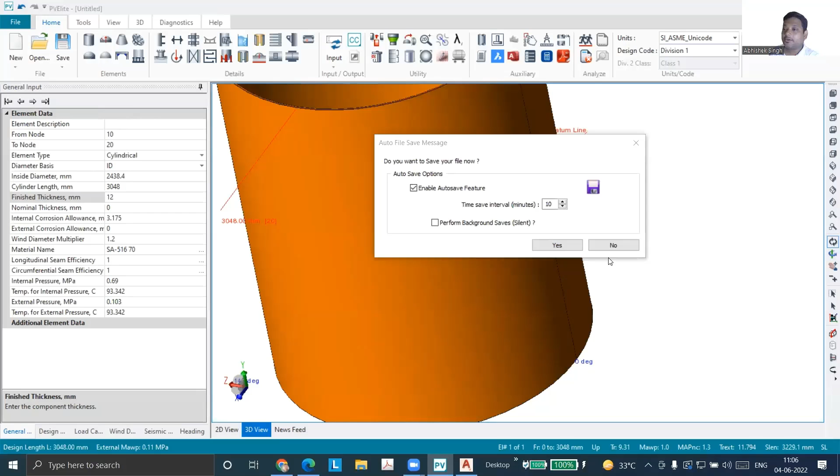So there was one question in the group: how to model this SRN nozzle in PVElite? I think I have also something related. Yeah, so we can just see that right now because we are already talking about that. So let us model. We have already made a... I hope you guys can see my screen. Guys, screen is visible, right? Yes, sir. See now, you might have been using these 4 types normally.

These 2 types are for set-on. This is also very rare. So mainly we'll be using set-in type of nozzle, 1 or 2. Now, if you go to this 5th one, if you just keep your cursor there, you'll see the type: integrally reinforced type. And this is with lip. You can see the lip here. This is what I was trying to make. So yes, this is a nozzle from forging with lip.

The second type is integrally reinforced, but there is no lip. So finally welding will be groove weld. So you will not be able to do 100% radiography, but it is integrally reinforced. So these 2 are different. Here you get 100% radiography. Your forging diameter is quite large in this. So the integrally reinforced with lip is even more costly than your normal integral. It may be 1.5 to 2 times costlier because your whole dia becomes really large.

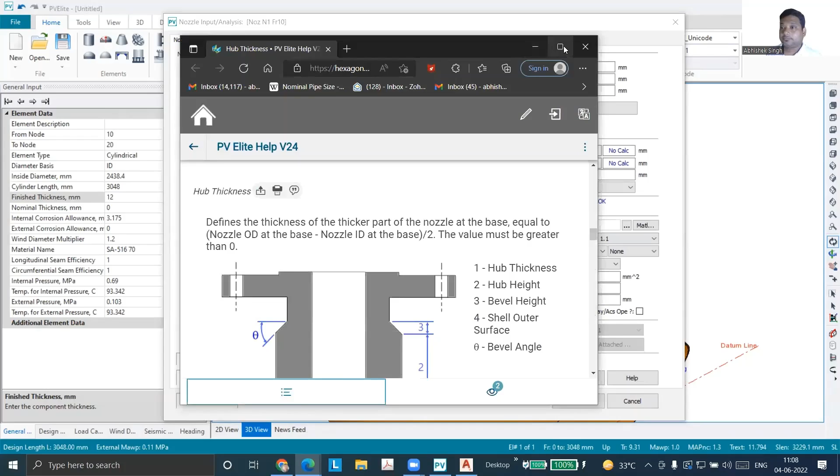So I just pressed F1 and you can see all the definitions. Sometimes you may struggle to see which thickness it's calling hub thickness. So this is your hub thickness, this is hub height, and this is the bevel height. These are the 3 additional inputs which we need to provide. What is the thickness of the neck in this case, guys? The same thickness that we have for the normal nozzles. Yeah, so I'll just tell you because that also becomes really confusing.

Then we forget this is not the nozzle neck thickness. What is your nozzle neck thickness in this case? This is your nozzle neck thickness. So whatever data you have provided in this location, that is for nozzle neck. Is it making sense? And here we are providing for hub. I hope I'm making it clear, guys. Yes, sir. So now if I have to qualify this, let us first give all that.

See, mostly if it is hub type, your nozzle neck will be forging type. So you have to first of all select the material which is for forging. You'll have to start from there. I'll just delete that sketch part. So now, what will be my forging material, guys, if I have to make a nozzle from forging? SA 105. 105? Yes, sir. For pipe also? Yes, sir, pipe also.

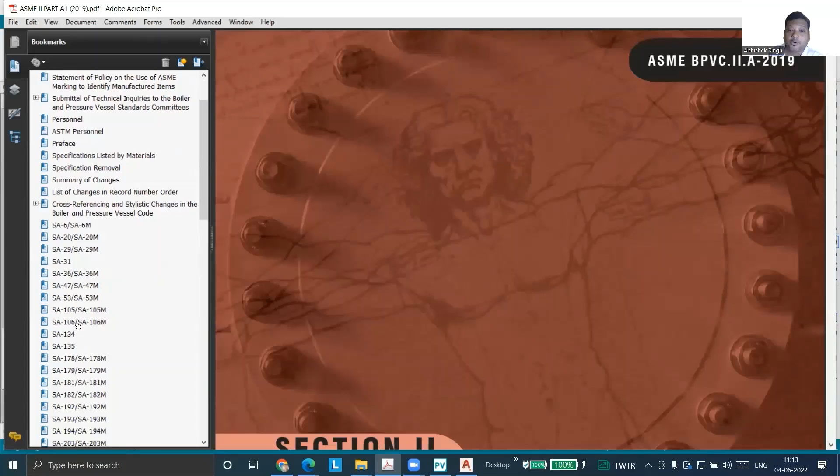So if I go to SA 105, where do I find SA 105? Carbon steel. Section 2A, part 1. ASME Section 2, Part A, and because there are too many specifications, that is divided into 2 parts. We are in part 1 because 105 comes from the start to 450, and after that is part 2. So when I go to the specification, it reads specification for carbon steel forging for piping. Is it lighting some bulb for you? This is for piping application, not for pressure vessel parts.

That means a standard flange you can consider as piping, but your nozzle or a girth flange which is coming in your vessel is not piping, it is a pressure vessel. So 105 is always made for piping application, not for pressure vessel. If I have to select a forging for pressure vessel, then which standard will it be? 266. Correct, 266. Very rightly said. So it is 266.

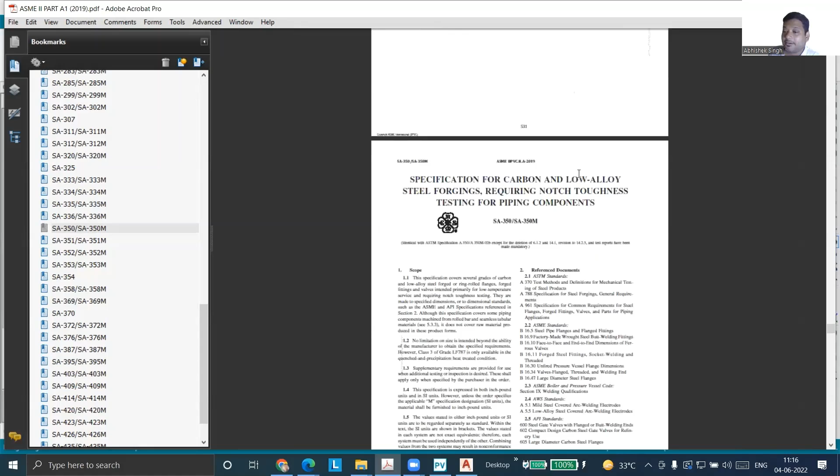For low temperature pressure vessel component forgings, we use SA 350. If you go to 350, we can see it is for carbon as well as low alloy, requiring notch toughness testing. Again, you can see here it is for piping components, but still for pressure vessels we also use the same material. So what about SA 765? 765 I've rarely used, but we can see what is written.

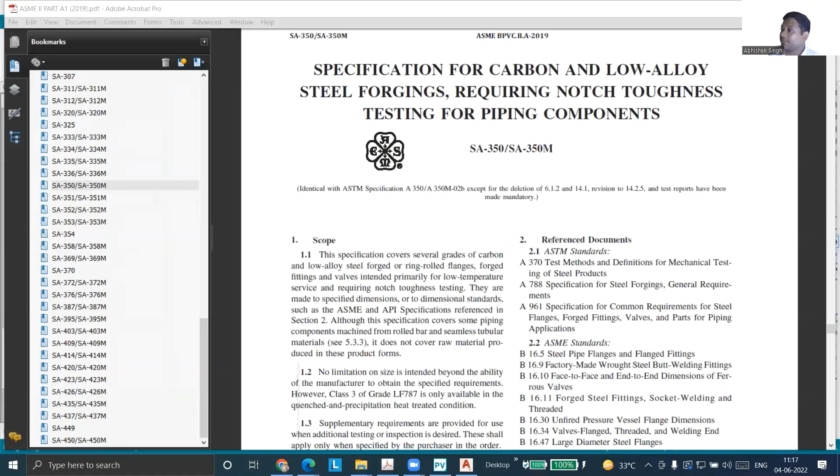I have not used 765, but see, there can be lots of different materials used in different industries. The material itself is a science; you can go deeper and deeper, and there are still lots of things to learn. So if you see 765 here: specification for carbon steel and low alloy steel pressure vessel component forgings with mandatory toughness requirements. So if the toughness requirement is mandatory for a pressure vessel component forging, we should go for 765.

Okay, who told about 765? No, sir. I have seen that 765 is being used with low temperature vessels. Correct. It is true. That is made for low temperature pressure vessels and pressure vessel component forgings. So if you have any doubt, just go to that specification, and if you read it, it will give you lots of information. We have not seen it in detail, but if you just go to the description itself, it makes many points clear.

Okay, guys. So now in our case, we just started with the first point. You see here, every point looks like a simple question. Sometimes when you ask a question in WhatsApp, it really makes it a little difficult for me to answer, from where I start, because I always have a habit of explaining things from the basics. So anytime you feel your question is not answered to your satisfaction in the WhatsApp group, keep that question for later, where we can discuss it in the live class. The query you have, others may also have the same query.

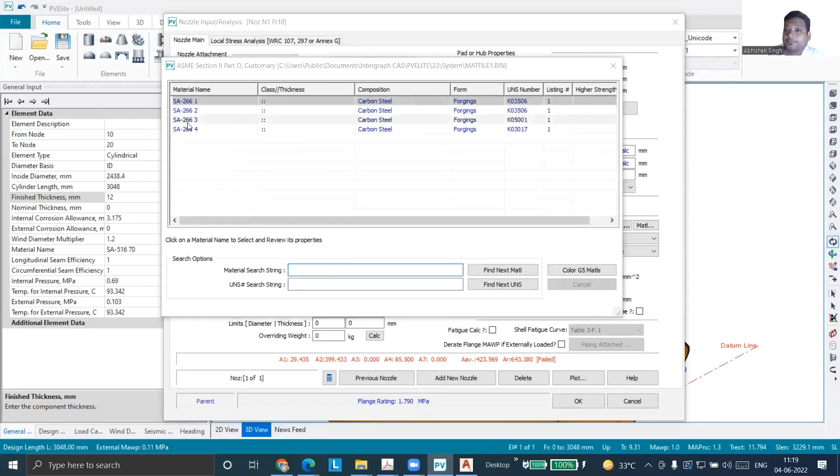So we have selected that forging material. Now if it is a forging, you don't have to go with schedule. We can just go with the actual dimensions; like if it is 6 inch, let's go with 6 inch based on ID or OD, and whatever actual thickness you are selecting, you can give. Okay, so 20 is failing, 25. We'll have to give the others also, then only we can see whether it is failing or not. Let us provide all the inputs and then see. Radial nozzle projections, everything is okay.

Now hub thickness, what should be my hub thickness? I hope you know what hub thickness is. You're talking about this thickness. So what value should I take, guys? Any random value more than our nozzle thickness. Yeah. So let us take 40. Now see, before providing that hub thickness, if I'm increasing this, there is no point, because finally the hub thickness was smaller, right? So it was failing here. You could see that failure, but it is not that this is the thickness which is required.

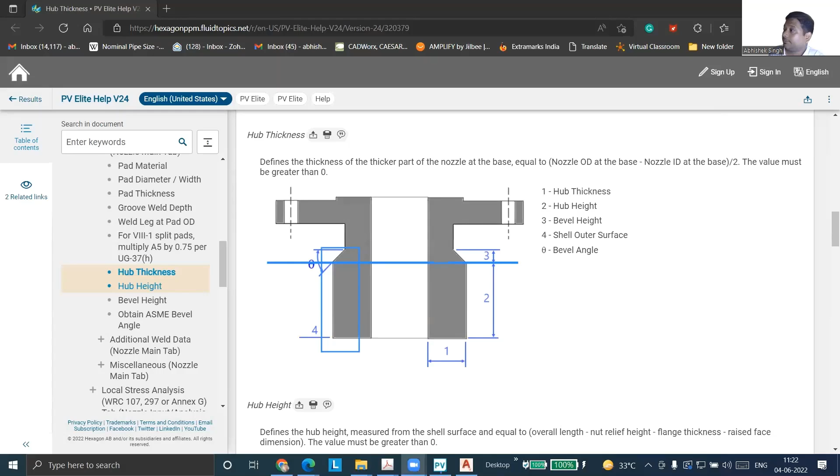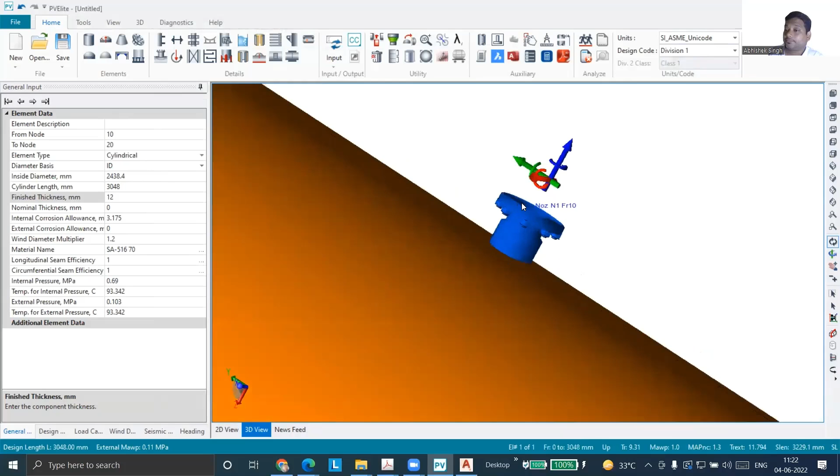So I'll come back. Then let us clear this. So 100 mm bevel height: in ASME there is a particular angle mentioned for this bevel height. If you see UW, you will get that value. Even if you use this obtain ASME bevel angle, you can just click on this and it will automatically change this dimension. If you want to round it off, you can do 90 and 10, so it will be very close to the angle which is given. Then the rest of things are okay. You can just put okay. Now this is your nozzle with self-reinforcement.

Okay, guys. Is it clear? Now, if I just change it to... So how do I give the 90 mm height, on what basis? There's no basis. See, if you just see what is the upper limit, based on that, you can reduce.

Now, let us come back to that 20 mm I had given and that 90 mm. And this was 10, right? So 20 or 30 it was. Last time we had given 20, 90, and it's passing now. So now you can just keep on. You can see here what is the area you're getting and what is the area required. So 851 is required and your area is 1199.

So if you keep on decreasing, let's say 50. Still we are beyond, I think, because normally the thickness is very small, right? 12 mm. So what is the limit for the vertical normal direction nozzle reinforcement? 2.5 times thickness. So if we do 2.5 times thickness, 24 and 6, 30. So if I take 30, now you see still 119.

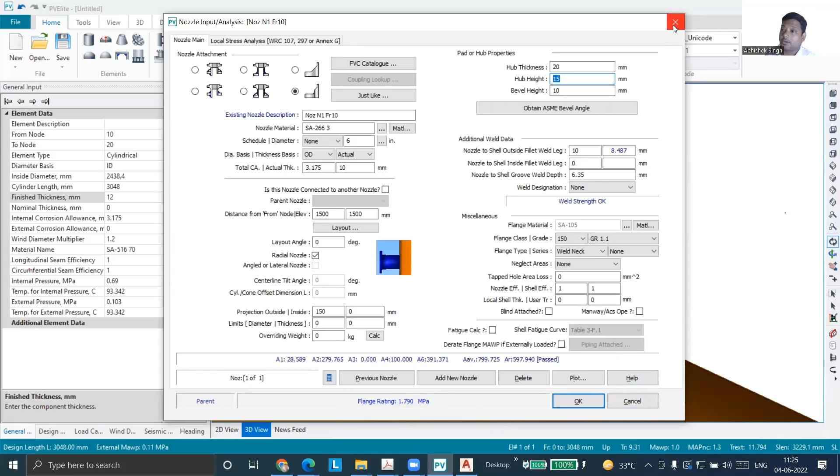Yes, more than 25. Because finally, if you're providing reinforcement, this length also becomes critical. Your neck has to have a proper projection. So you have to increase not the neck thickness, but the length of that neck, so that finally your projection is exactly where you want. And if you're providing a hub, we generally keep it almost half of that. We don't give such a small hub.

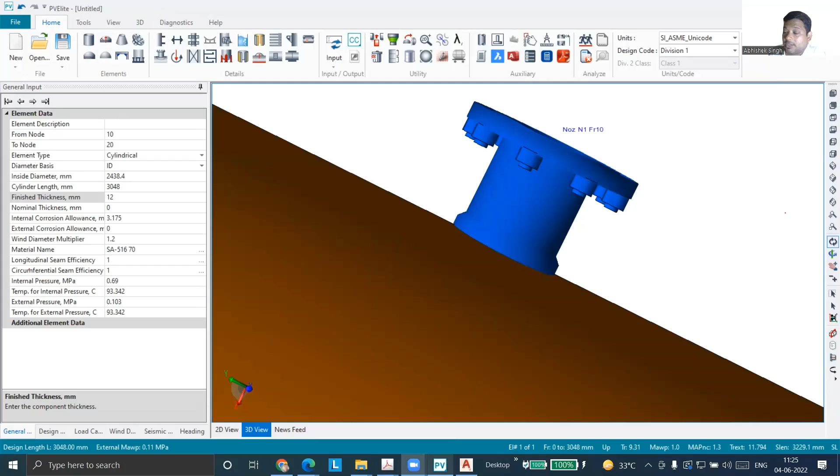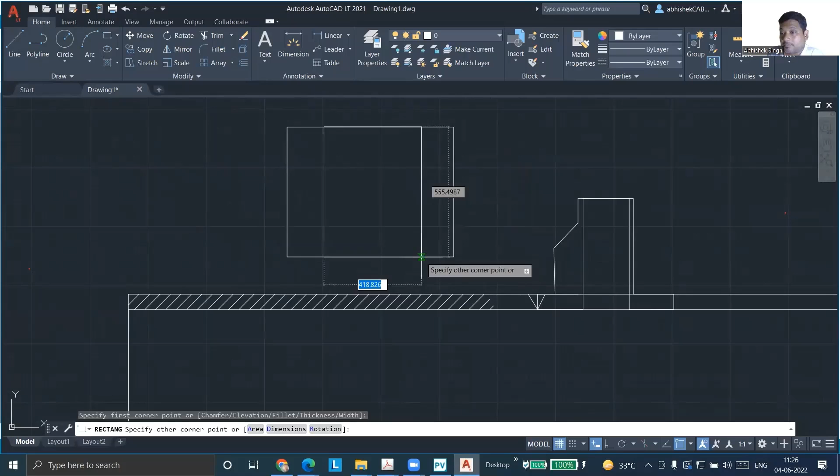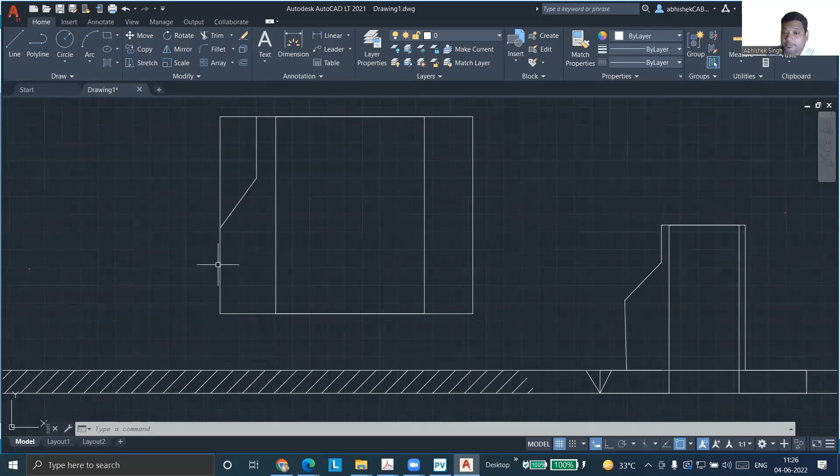Because finally what is happening, you are getting a forging. Let us discuss that also. You might be thinking why provide extra, but it is otherwise. If I have a nozzle like this, this is my nozzle. What finally we want is this forging. This is the final shape you want, and you will not get this shape directly, right? You have to order a forging of what I have made. Making sense, guys?

This is the hashed portion you want, and you have ordered a forging with this shape. So finally you have to machine it to this shape, isn't it? So if you have to machine and remove, why not utilize the maximum, right? For your machining activities also, it will benefit you to give higher thickness here. It is a little otherwise. Normally, to provide higher thickness we have to spend money, it is costly, but in this case it is costlier to remove material because that many machining hours will be added.

Making sense, guys? That is the reason with self-reinforced nozzles you will see the proportion of hub is quite large. Yes, sir. Okay, got it. So you don't have to bring it down till here, because anyway you have to meet that projection of the nozzle. If you don't meet that, your boltings and all will become really challenging. So instead of machining the whole nozzle neck to that neck thickness, we provide that hub. I hope it is making sense now.

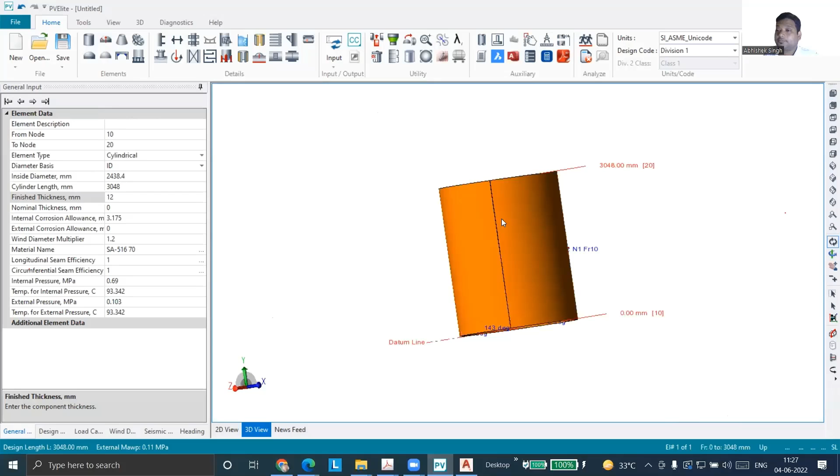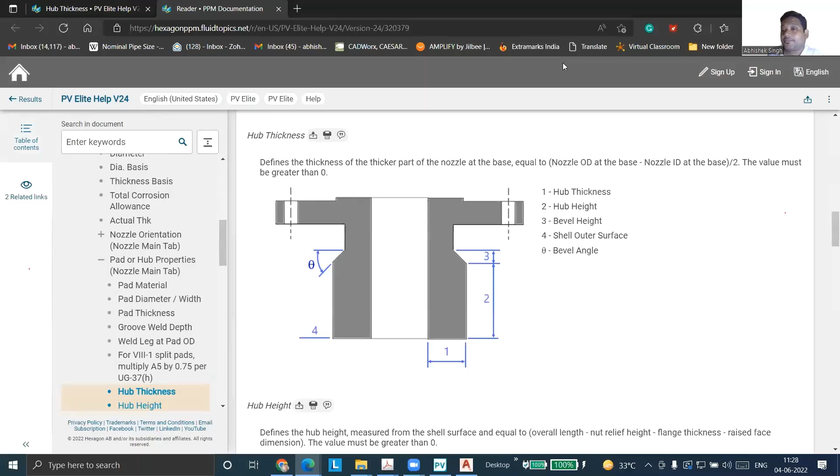Okay, so I hope this type of configuration is clear. If I just change it to the other one with the lip type, now you see here only the hub thickness and how wide it is is important. So what is my hub thickness in this case? Which is my hub thickness, first of all? You can again press F1 in PVElite, and the same diagram is opening. So now let us see some different configurations they have mentioned.

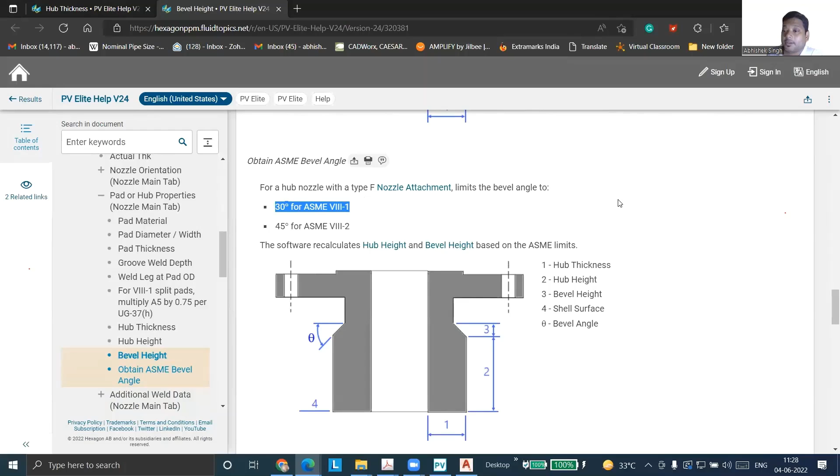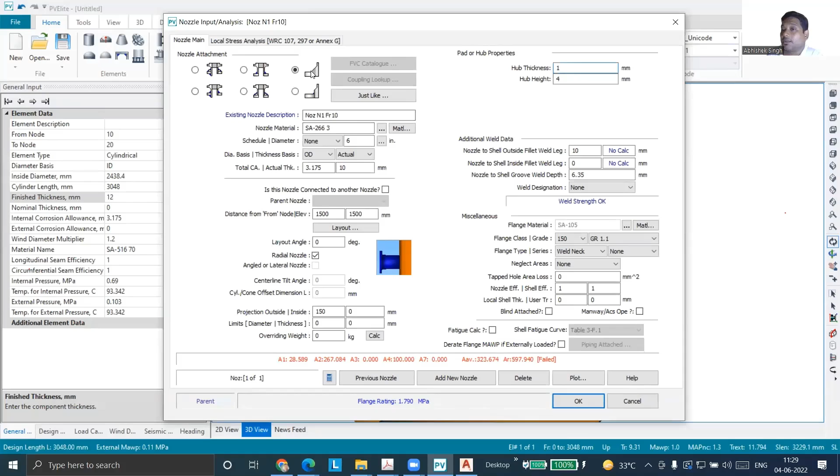Okay, so now if I have to provide a hub thickness, hub thickness is this thickness. So in this case, what will be my hub thickness? Till here, this point. Okay, if I draw it for that case, we already have this. So yeah, just draw it. So if I have provided a hub like this, my hub thickness is this point.

Okay, so if I'm taking that hub thickness like that, let us take it as 30. Hub height at least 25, 30, same philosophy. Okay. Now if it is again 30 and this is not meeting, no, it's meeting actually. See, sometimes PVElite takes some time to recalculate. So you have to just wait and press tab so that it will adopt the values which you have provided. Okay. So now you see that the area you have provided is much more than what is required. So it is okay.

Now you can just plot it also and see how it is coming; we'll have to change that. Fillet will not be applicable for this case. Okay. So you can see here that limit is also indicated. See here. And you also have to remember that it is not 12 actually over there. Required thickness is even lesser than this. Okay, so your vertical normal applicable reinforcement limit is even lesser than 25.

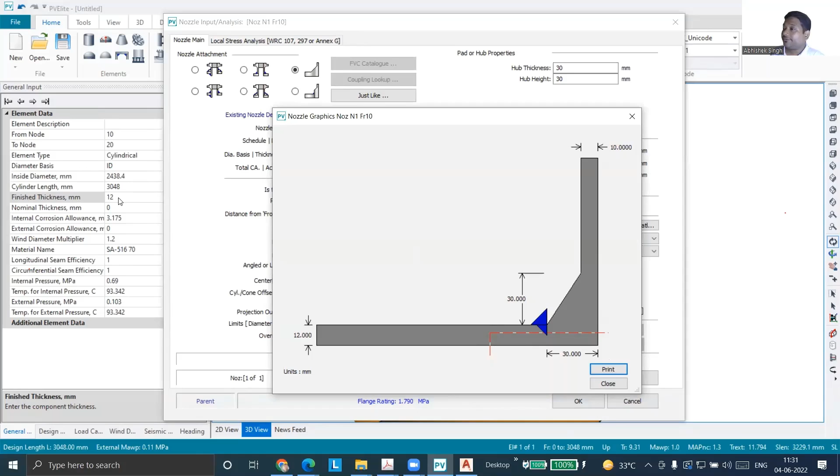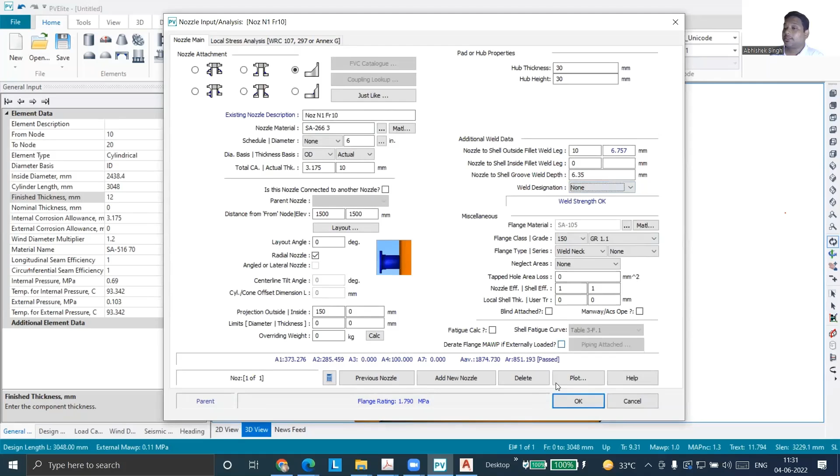So now if you see this, okay, nozzle to shell groove weld will not be there. You can select a different configuration as per ASME also. Based on UW, you have lots of figures, right? So that option is also available for weld designation. You can select. Okay, so is it clear how we do it for different self-reinforced types of nozzles? When to select lip and when to go for normal?

Sir, in the lip type nozzle, hub thickness is up to the weld, up to this point? Yes. Not up to the weld, but where your taper is starting. Okay, so if you have provided a nozzle like this, there may be even some straight portion, and then your hub taper is starting. So in that case, this. If you don't have any straight portion, starting from here, then again this point.

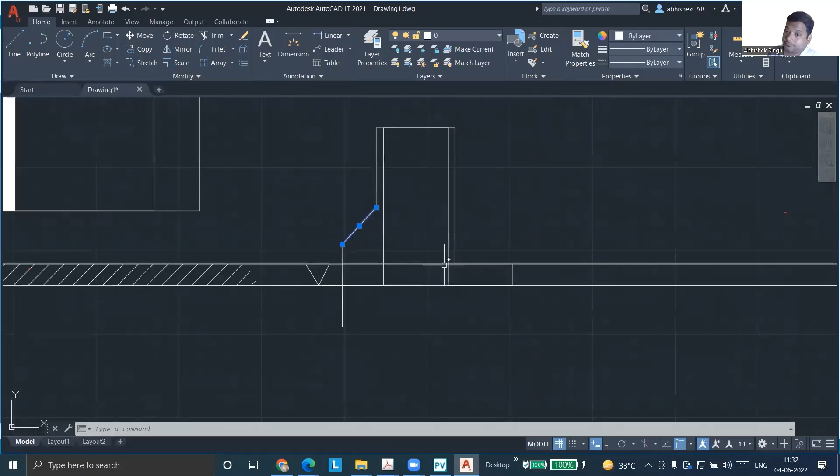Sometimes we have multiple tapers, like 2 slopes. Yeah. So with 2 slopes, then you have to consider the first one. Okay. First one. Like sometimes it may be even like this. Okay. So this will be your applicable hub thickness. It is from where the taper is starting. Okay.

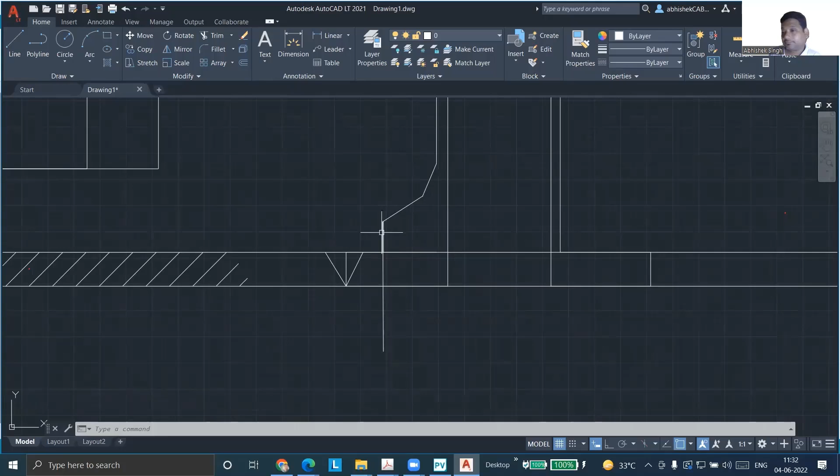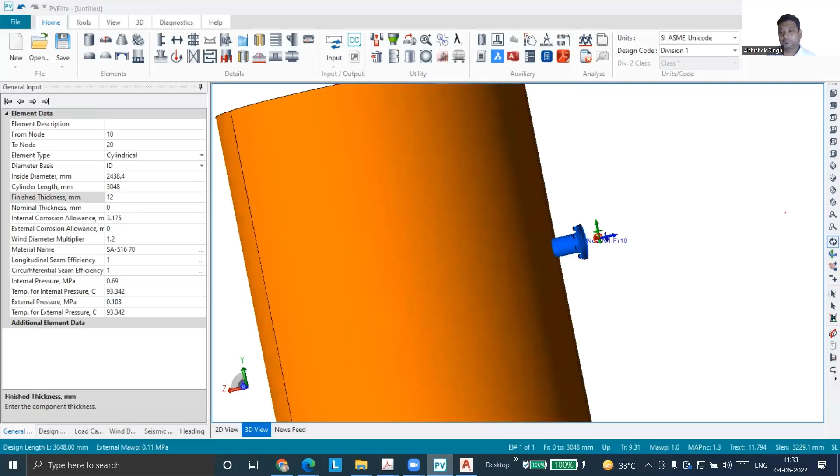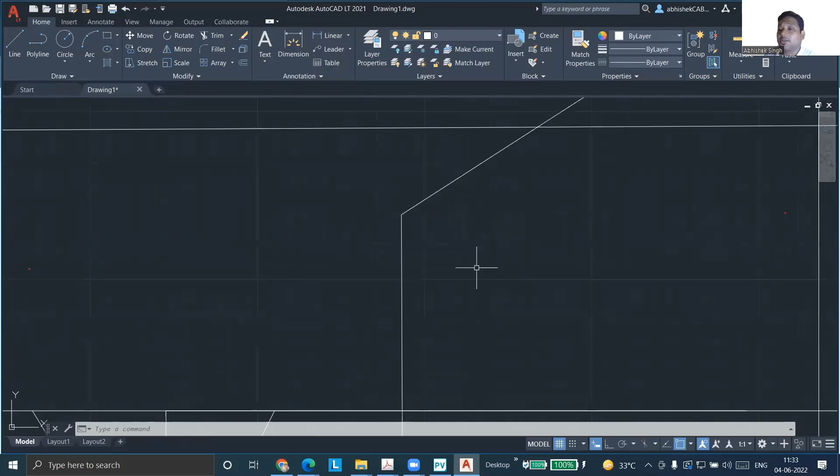Sir, if we are taking from the first part, then actually we are not having the reinforcement available above that point. Not available above that point means? Like if our vertical reinforcement limit is above the tapered line, the blue line. So like this, yes. Then we are not having proper complete reinforcement in between. Why? See, whatever area is there below this line, all will be considered for your reinforcement. It is not like this is the point where the reinforcement is limited. It will be calculated up to this point, whatever reinforcement you have provided. All will be counted.

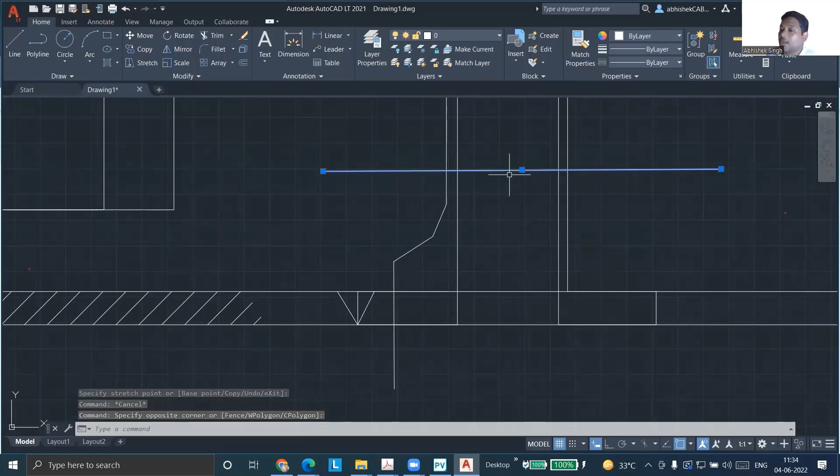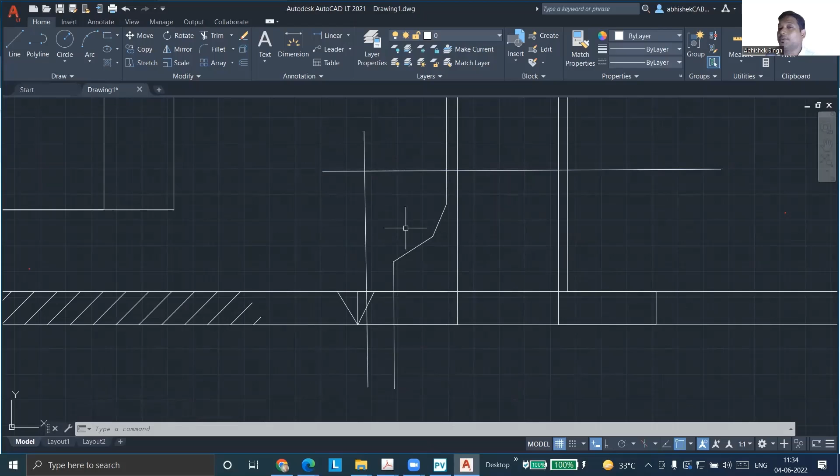Even if it is going beyond, it does not matter what words we are giving. Finally, the basic is whatever area is coming below this line, it will be considered as reinforcement. How you provide the shape, what is hub, what is taper, it is not dependent upon that. Those are the words which we have given. But the basic is the reinforcement area, whatever was required. Apart from that, whatever you have given, whether by means of weld or by means of additional thickness, everything will be part of reinforcement. Okay.

Great. So in that case, do we need to perform the WRC or is it not required? WRC for which, for this nozzle you are saying? Yes, sir, for SRN 14. You can perform WRC. There is no challenge in that. Finally, it is a cylinder to cylinder junction, right? So WRC is not a problem. Sir, is it a must? Not a must. WRC depends upon whether loading is there or not. Whenever external loading is there, then you have to perform WRC. It is not dependent upon the type of nozzle.

Okay. Making sense, Saran? Sir, actually, code has not given the rules for the WRC. It is our call to perform that. Yes. And definitely, see, WRC means whenever there is external loading, then only WRC comes into the picture, right? Otherwise, see, code is simply saying whatever loading is coming, you have to take care. Code is very clear in that. Code simply says that you have to find your own standards and methods with which you can satisfy your authorized inspector.

Okay, so the statement is very simple, but it is trickier. Unless you select a method which is very widely used, it will be difficult to satisfy that AI, right? Because AI has been doing this checking of this calculation. So whatever he might have seen, he will prefer that method. So if he has seen WRC calculation for external load, he will like to see that. If you have done it by some other method, he will ask lots of questions.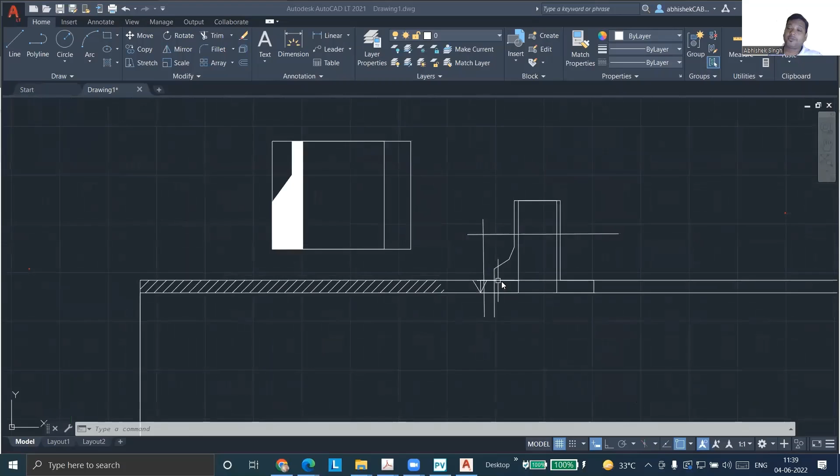Unless for some reason it fails, then they will ask the question, oh, we followed some good engineering practice, but it's not correct, we have to build in some additional factor. So like that, many things are there. Okay. It might be due to stress concentration, what you are asking. So unless we have a contour which is very uniform, a transition of 2 different thicknesses, if it is not uniform, there will be stress concentration built up in that area.

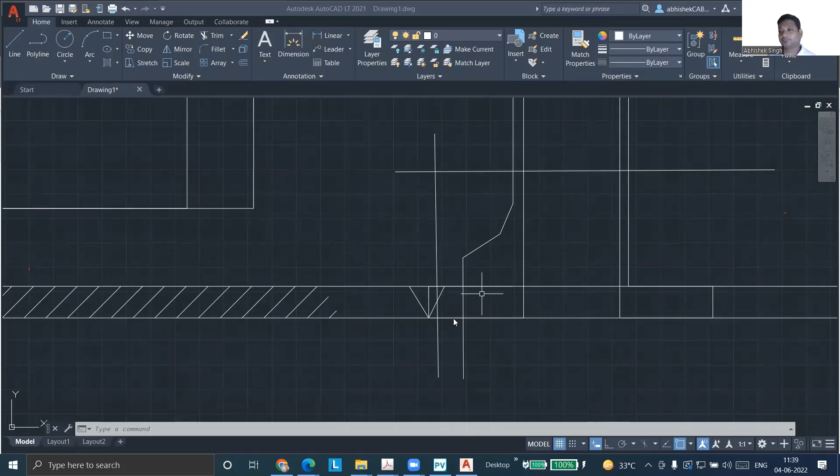So if you're talking about Section VIII Division 1, we never bother about stress concentration or peak stresses. So that anyway does not come into the picture, right? Yes. Only when we do FEA, that time you'll be able to see what is the stress concentration, what are the stress raisers which are there in your shape. Okay.

Any other question, guys? Adnan, you're back. Yes, Mr. Abhishek. Yeah. You understood? We discussed a lot about this SRN and the hub type. Yeah, I understood. Thank you. I'm actually at work, so I cannot talk, but I understand. Thank you. Okay, great. I hope you understood that.

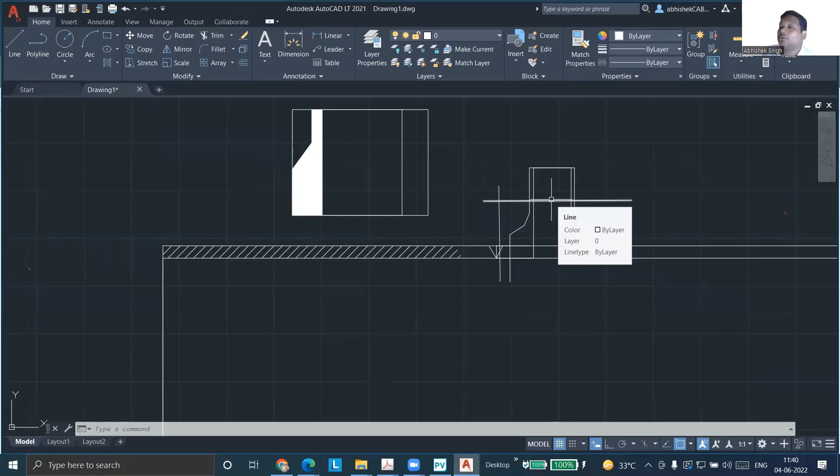So in which criteria? The only point is that whenever the client is asking, that time you will go for hub type, because those are really costlier. Okay.

Okay, guys. Any other question? Hello, Abhishek. Is my voice audible? Hello. Yeah, Jairam. I can hear you. Yes, I had a small query.

Initially, we discussed 2-inch and smaller nozzles. I think for small bore connections, we provide stiffeners, right? Yes, correct. And for higher sizes, we do the stress analysis and try to qualify the nozzles. But for these smaller nozzles, in case any instruments or analyzers are connected to the nozzle, generally I haven't seen any specific calculations or qualifications for this. So is there any calculation for how the stiffeners need to be?

I think you said there will be 2 stiffeners at 90 degrees. I think 120 degree, 3 stiffeners are also being used. That also; mostly 90 degrees apart is mainly used, but definitely it can be 3 also. But is there any calculation to qualify this?

Because my only concern is I haven't seen any calculation. My specific concern is for bigger analyzers or something for a stack, which need to be placed. Do we need separate supporting for this analyzer load, or can the nozzle take this? How do we ensure that? Correct. Okay, I'll answer that.

See, first of all, whenever we are doing nozzle calculation, as per code, you have to calculate for whatever pressure; the thickness you have to evaluate based on UG-45. Apart from that, that is about pressure as a loading. If you consider pressure as a loading, it does not matter whether it is attached to an analyzer, it is a process nozzle, or an instrumentation nozzle. The methodology is the same for all.

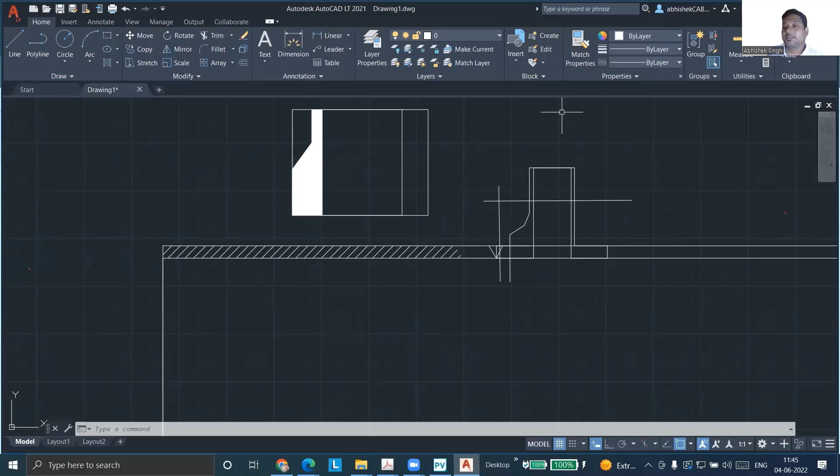Yes, Abhishek. Initially, for the agitator you mentioned, for the stiffeners, some calculations were there for the dynamic loading. Yes. What was the reference? See, the difference was that if I have a vessel with an agitator loaded on it. The example we took was a vertical vessel. I'll just draw it for you.

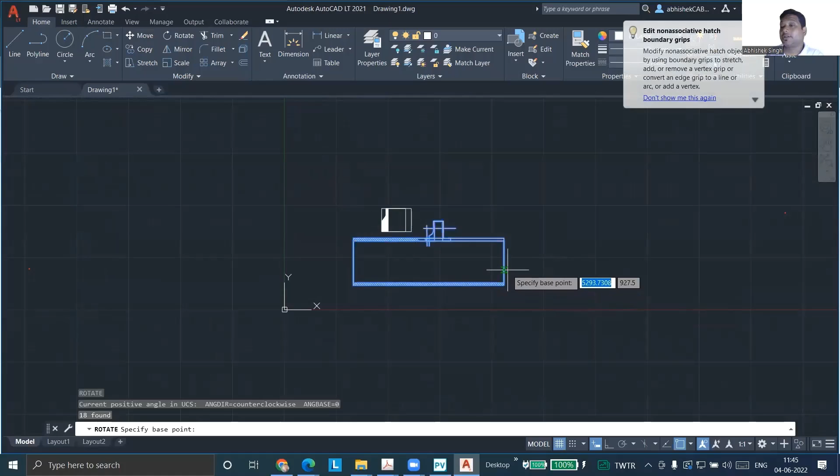No, my question was if there is any standard or code for that calculation, or equations to be used. The equation you have to use is the Roark formula. Have you heard of that book? No, sorry. Okay, I'll share that book with you, or in the group itself.

Roark is a very important book, and you will find lots of different types of formulas in it, and you can convert your problem to match them. Definitely you may not be able to get the exact thing, but at least if you are able to simulate it conservatively, you can find some formula which may be conservative for your case.

Definitely with that you can justify to your AI or your client. So that is a very good book. So just go through that and let us see if you are able to understand. The first time you see it, it will be difficult for you to use, because there will be lots of formulas and you will get stuck on where they are taken from.

So I'm just finding that book and I'll share it so that I don't forget. Sure, Abhishek. Thank you. I'll go through that. I have just found it and shared it in the static community group.

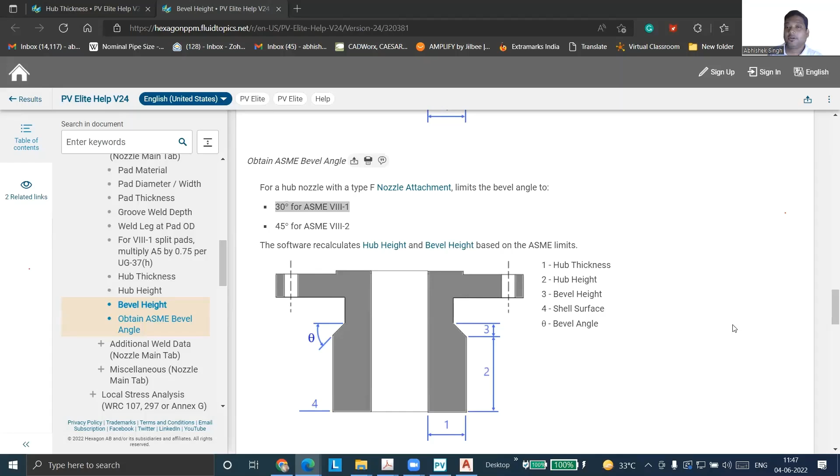So just go through that, and like if it is a flat plate or circular plate, you will find the loading for each type. Like a point load at the center, or uniformly distributed load on the plate. Or even varying with some equation, all the different configurations you can find in there. That is a very good book to follow. Okay, Abhishek. Thank you. Great. Thank you.

Any other question, guys? Anything which is bothering you? Sir, one thing I have to ask. In flange design, for Appendix 2, we are designing with respect to the operating basis and hydro test basis. So in our standard flange, what was the basis for those flanges? Because if we design those same flanges, they do not qualify.

Yeah, I'll tell you the history of that. See, the standard flanges were made when we didn't have the formula for calculating the thicknesses of the flange. When we made the standard flange, at that time we could not validate it with the available tools of mathematics. No FEA, and even design by rule was not developed to that extent. So they took a conservative approach. They made some flanges and used them for different pressures.

The practicals were done: they made the flange, kept on increasing the pressure and saw at which level it was able to take the load. All the pressure-temperature ratings which you see are developed based on actual experiments. So it's all practically driven dimensions, not calculated theoretically. So a standard flange you should never qualify. The code also says you don't have to qualify standard flanges, you don't have to design them again by Mandatory Appendix 2. Mandatory Appendix 2 is only for non-standard flanges.